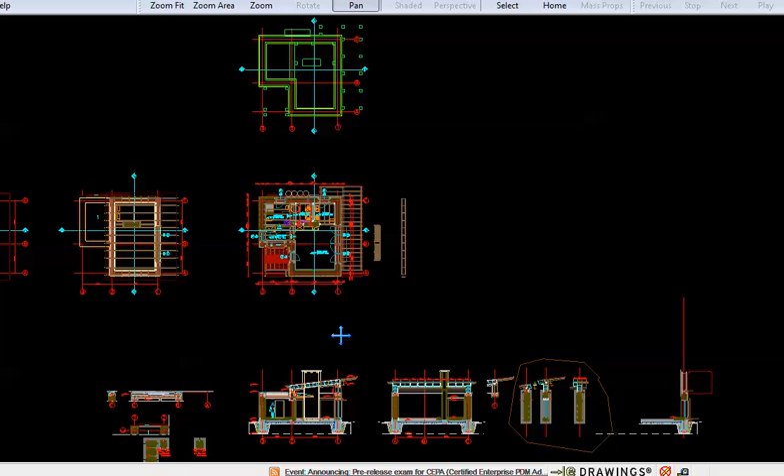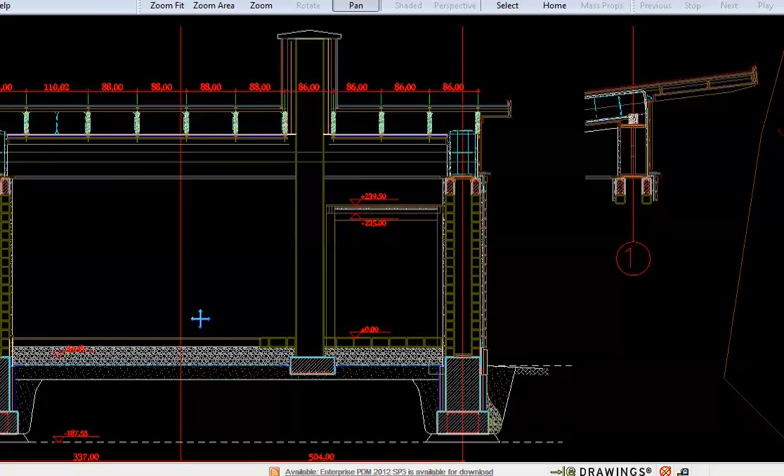That's why I was asking in an email to Floyd to analyze it earlier, because it's not so easy at first sight. Floyd needs to think about it a bit to fully understand what is here. Maybe the best idea is to give Floyd some time, an hour or something, to think about it.

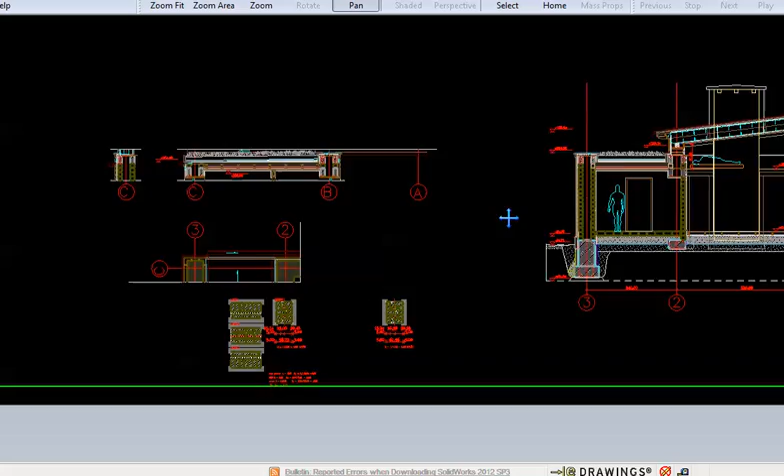The best ideal world would be to print it on paper and take a red pen, and just sketch vulnerable places for Floyd, places that need to be discussed. This is the process I'm using with my designs. I always print it and try to analyze it in an analog way. Okay, that would be a good place to start.

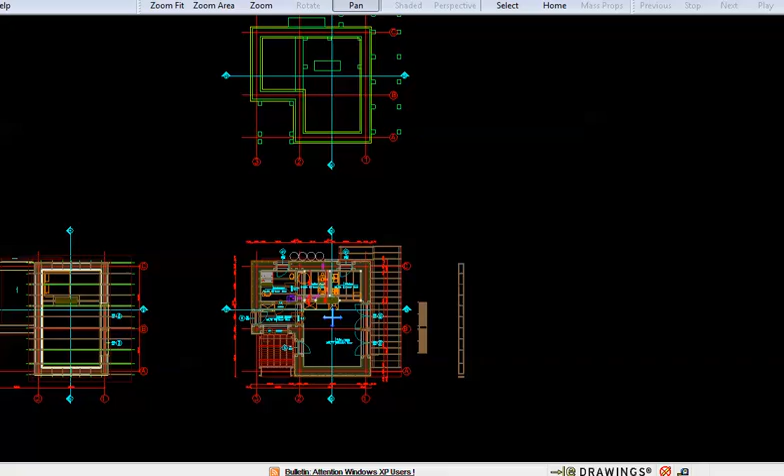There's a number of different details. I think it could use a little bit of annotation, as far as I'm looking at all the sub details, on the right. You mean the detail on the right side? Yeah.

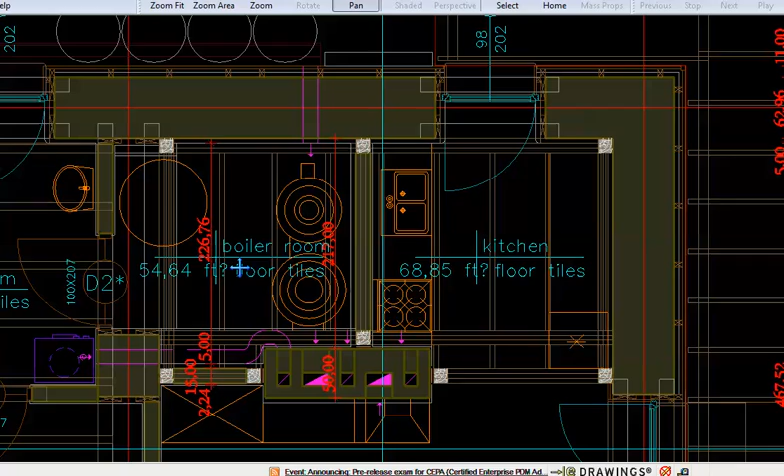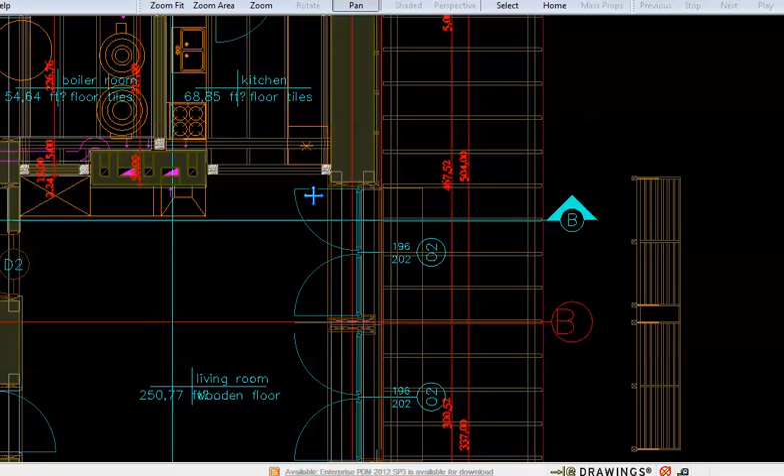Because I found some Polish book about masonry, and that was a funny story, because I found drawings about using this triple system wall with an interior cavity. That's what you're showing from the cross section, something like a triple. Yeah, this is the modification, just to let you know that something exists in the literature, in the books.

It was very exciting to me to find it out, because first I thought it was a completely original idea of Floyd's or yours, but no, I found it in the books. So it has some history. I will send you a scan.

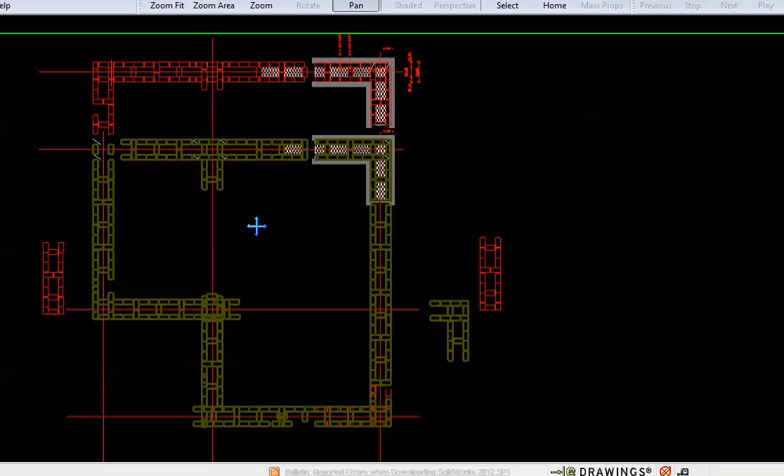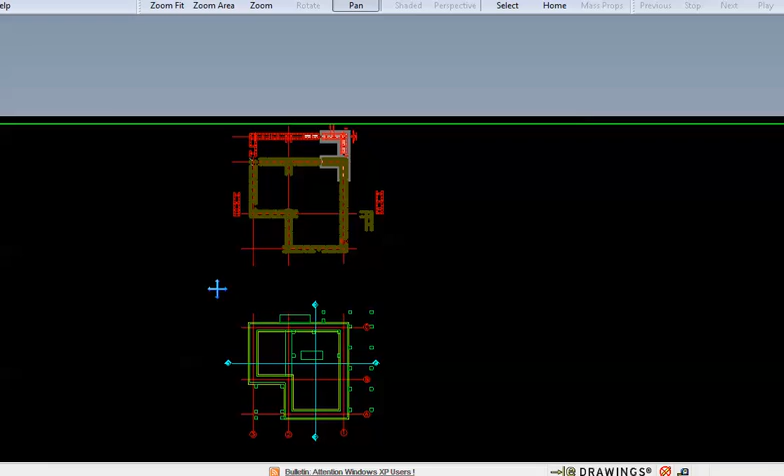Yeah, if you can send a scan, can you maybe do this? I'm thinking, since there's a lot of different details and points you can't see without studying explicitly, can you take printouts, put them in a PDF, and put more specific comments, little annotations, like, for example, this is this, and the reason for doing that is such.

So basically present a booklet of design rationale for why you've got certain details as they are, and also explaining some of them, because I don't think it's transparent as far as the material selections or some of the components.

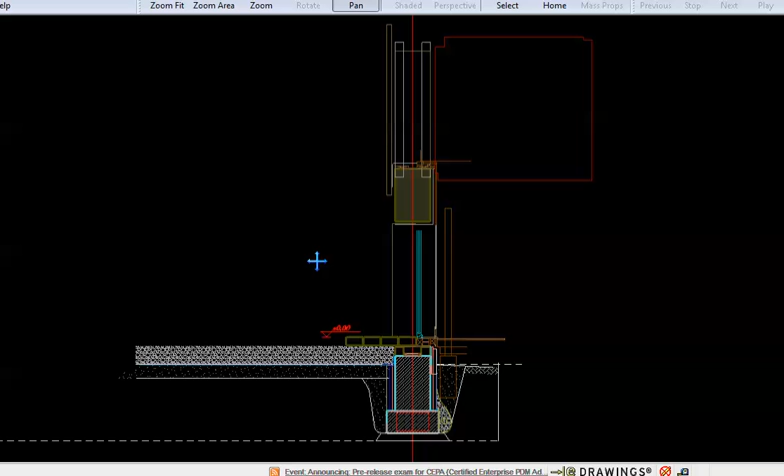If you could maybe just detail a few things, like what kind of wood you're using, what's this face made of, and just design notes, because what you have right now is just a plain set of pictures, a very technical detail.

Floyd, tell me, just immediately looking at it, what are the questions that you would have? Well, does he call out any size on dimensional lumber and anything like that? Okay, so I don't see any sizes on anything.

Okay, so if somebody's going to come in, this house won't be... I don't think you can build it. I don't think a non-skilled group of people can come in and build this house. It's a little more deep, a little more with all the details. It's more complicated than just a group of non-skilled laymen coming in to build. There's a lot of details there.

Yeah, I was looking for maybe he does call it out here. Let's look, see, he's got some areas, but he doesn't call out the dimensions on the lumber. Okay, so Floyd, the first thing, because you would need a part. You've got to have your list of materials, and that's derived from your computer, it will bring all that up.

So the first thing Floyd is asking for is material specifications. Like if you've got whatever lumber you have, just call it out, what is it? Right, so that would be material specification and some design rationales.

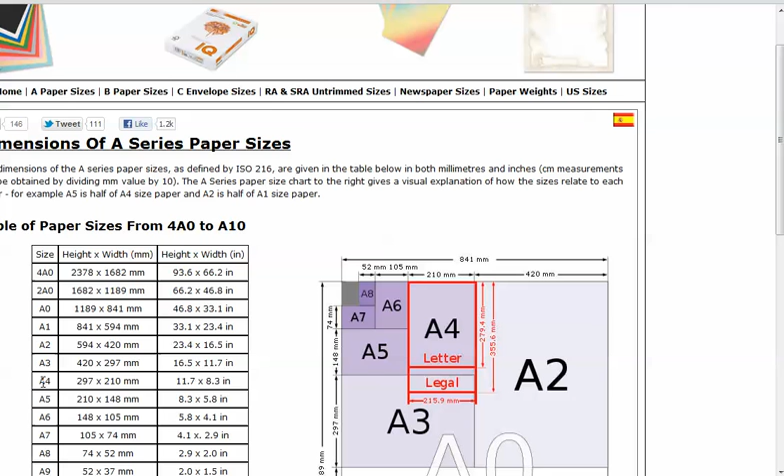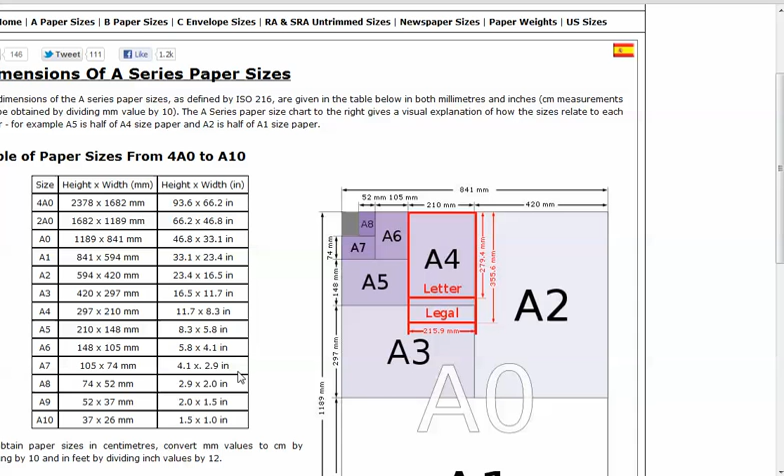Zip it and I can go to Office Depot or something, I can print out big blue line sheets. Also, Floyd's saying we can get it and just go to a print shop to get bigger copies. If it's possible for you, no problem.

I will prepare about A3 format. A3 format. Aaron, is that standard for print shops? Print shops can do that? I think so, I'll confirm that. That's A3 format.

Okay, so when can you send me these drawings with simplifications? Well, we don't have drawings. We were drawing those basically on backs of envelopes, just very simple sketches. But Floyd, when can you get us more of a technical drawing on that?

Give us, yeah, what we discussed about the simplified version details. I can give you roof attachment details. Okay, in the drawing. Okay, the details, so you'll do that. It's something a layman and a few people could put together.

So very basic, that's your layman design. Yeah, anybody's going to try to get a block machine or try to get somebody to make this stuff, and it's going to be a group of people that won't necessarily be engineers, won't necessarily be a builder even. So you want stuff simple enough that it's going to go out.

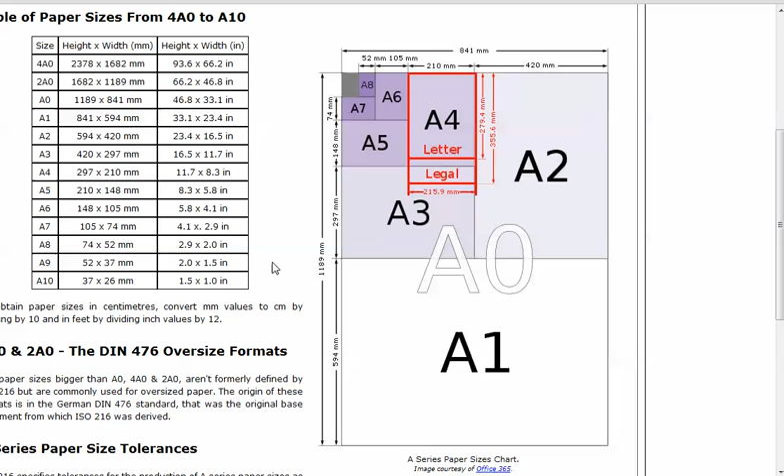This simplified version, are you only simplifying the details, or are you simplifying the whole 3D geometry of the house? Geometry of the house, so the whole, basically the structure, to make it such that...

For example, we can make roof panel sections, we can make a whole mechanical unit that you can basically build even off-site, and you can just retrofit it into the house. It's already wired, it's already plumbed, you set it in place, and then the kitchen just bolts right up to the outside of it. It's already there. So a unit with wiring and plumbing to which you attach the kitchen, like kitchen sink and stove, things like that, so this would reduce the amount of time to build this drastically, and still use the insulated double walls, insulated roof structure, panelize the roof, keep the wall detail pretty much the same.

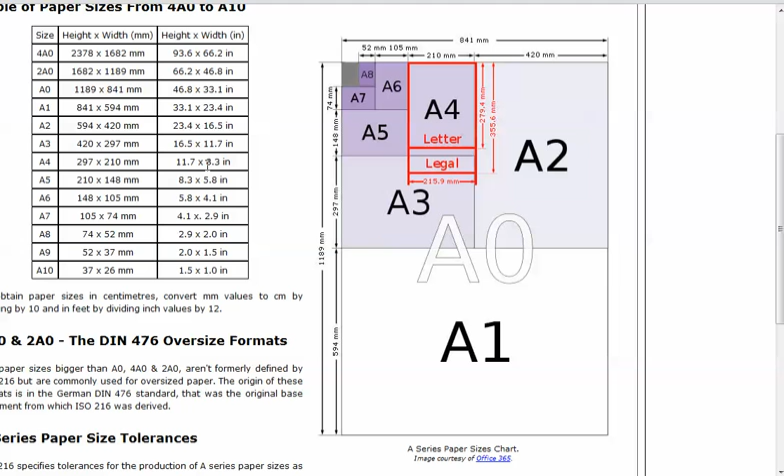All right, so basically with this simplified version, we have different assumptions to the design. Different assumptions about the level, probably the biggest being the level of skill in the build process, and an assumption of how much time it would take, basically reduction of labor by simplifying the structure.

So at the end we will have simply two buildings, because this simplified version is a completely different version of this. Which I think will be good, because then people have a choice if they want to spend more effort and make it more aesthetic, they can. For us, I think the aesthetics will be quite decent as well, comparable to what we're doing here right now. So I think it will still be attractive, and normal looking in some way. It doesn't look like some kind of freak show. It'll be like a cabin or a studio.

All right, so let's see, let's do that. Let's get some of that feedback, and that way we can check the various details that you're putting in to make sure it's all buildable and according to what Floyd's experience is on CEB construction.